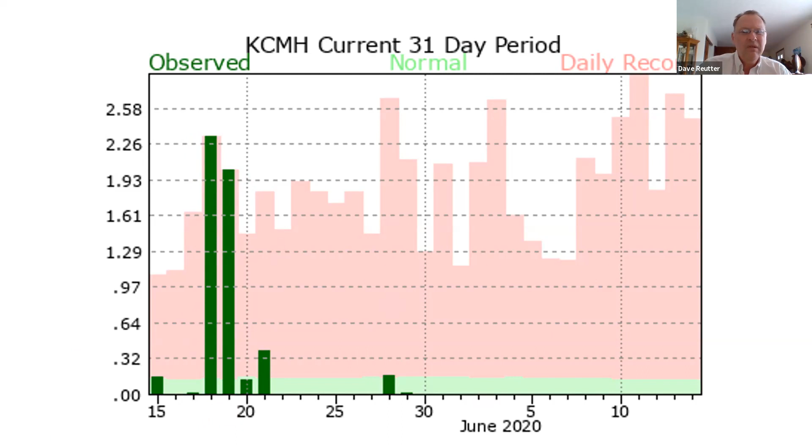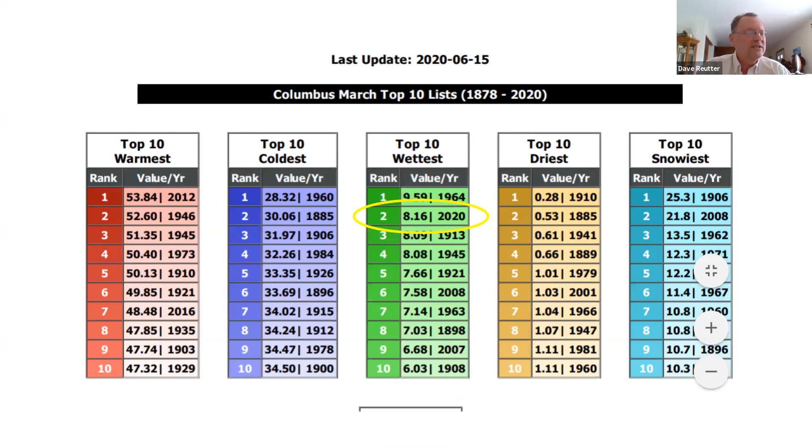There again, you can see our top 10, 20. So then here's our annual data.

You can see down here, we're looking at June. Here's the 2 events—you see these 2 steps in the precipitation right here. Here's your March event, here's your May event. And we're already at 25.6 inches of rainfall compared to what your average normal is, very low, much lower.

And if you look at the top here, our average rainfall, most of it occurs here. Here's the peak—we haven't even gotten to the peak yet. So we are well on our way to perhaps another record-breaking year of rainfall. That'll be, we'll have to wait and see what happens as far as the rest of the year.

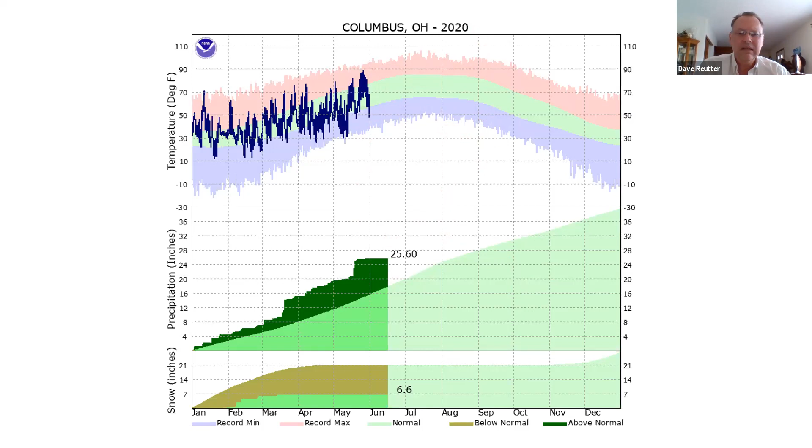So the other thing I want to take a look at then is just kind of what that does—how does that affect our streams? This was a presentation you can see from our expo. Dr. Bob Hawley presented, and again, like I say, we'll have this resource.

You can look at the whole thing. I'm not going to go through the whole presentation—he's got about 150 slides on here. So we'll just kind of hit through some of the highlights, at least that I thought I want to present. And some of that is looking at, what is the urban stream syndrome?

What's causing that? And those drivers, you can see: direct effects, channelization, indirect effects, pollution and stormwater—but how those all combine within the streams to get that biological response, which is often what we do to look at these streams. We do sampling in the streams, we look at the bugs, we look at the water quality, and we say, hey, there's a problem with this stream. What is that? But you've got all of these altered features that are happening because of that flow regime.

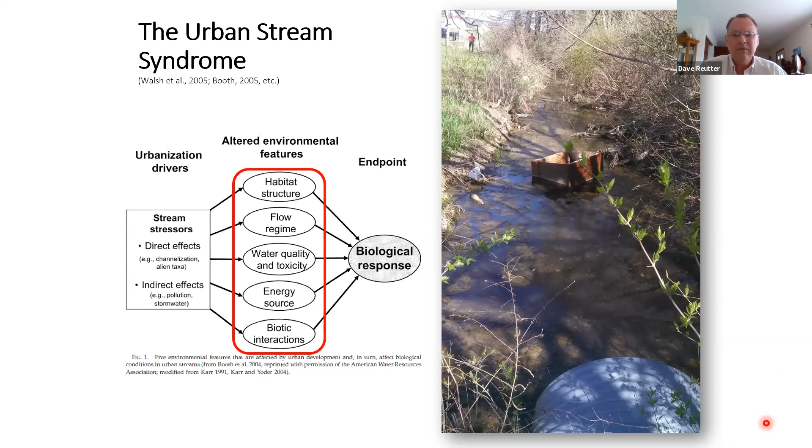Go to the next one here. The stream function pyramid, as you can see, everything kind of builds to that biological. So if you're going to affect change, it's going to come down here at the bottom—you've got to get that base problem fixed before you can do that.

And a lot of that comes to stormwater management. That affects your hydrologic conditions, the hydraulic conditions. It affects your geomorphology, goes to the physicochemical features of the stream, and ends up affecting your biology.

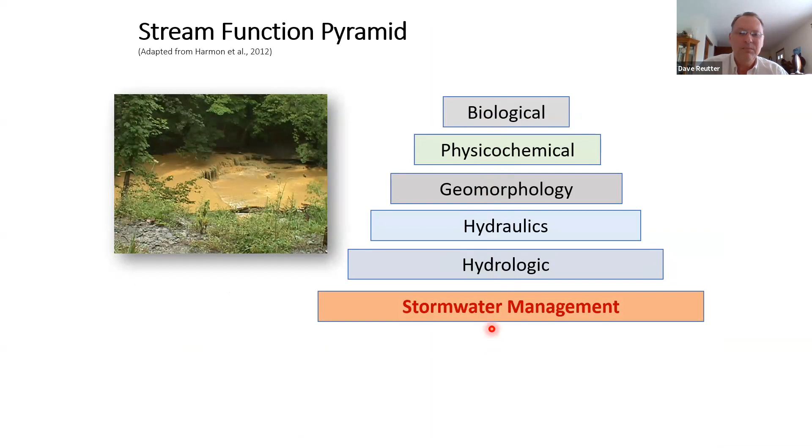So if we're looking at stream restoration in urban catchments, you've got to look at that catchment to save the stream. We're talking about that green infrastructure idea—broad-based changes in the catchment is how we're going to improve our water quality in streams.

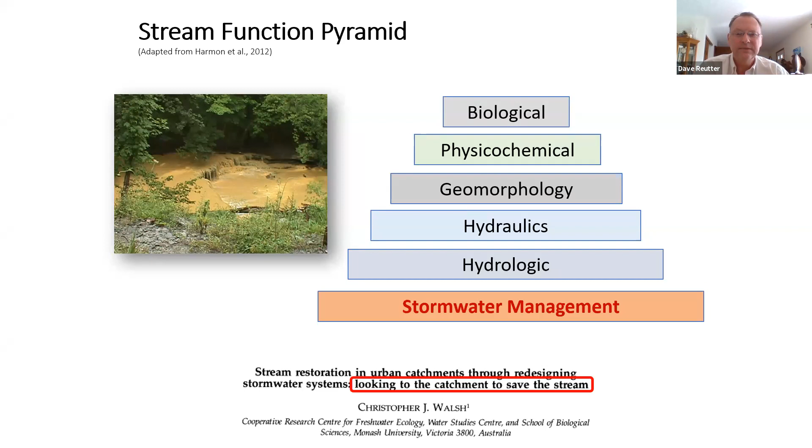Bob did a good job on kind of updating us on how we've developed our stormwater. So this is the last kind of slide in that presentation on where we're at with stormwater: extended detention basins with sediment forebays. And we're looking at basically conventional peak-matching detention, which is how our conventional current stormwater approach is.

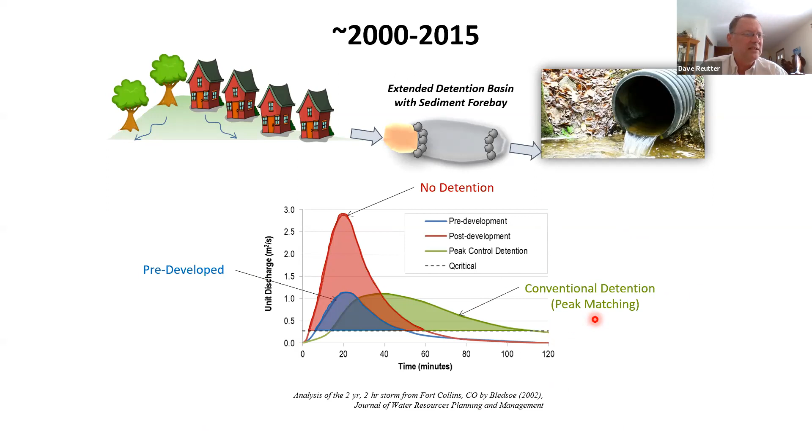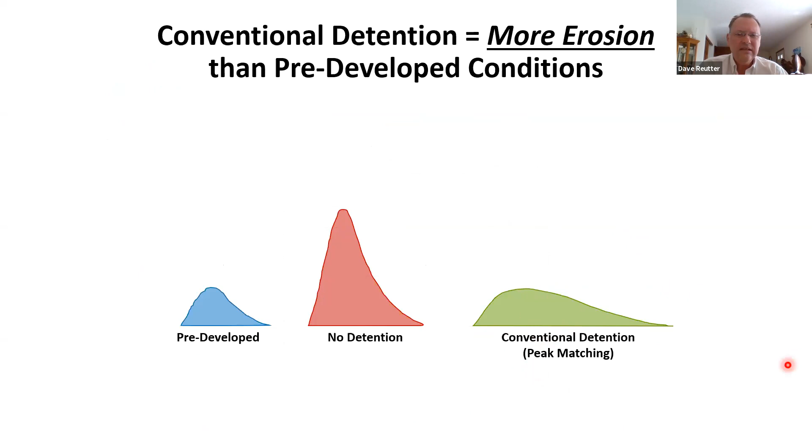Now, so what does that mean to streams? Well, because of that conventional detention, we're looking at more erosion. This is caused because we're looking at that Q critical flow regime that they're looking at, if you've worked with Bob or have looked at some of his studies.

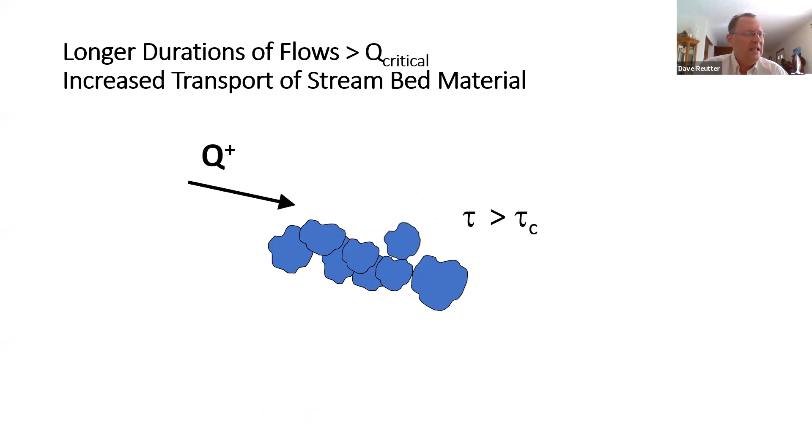As you increase that flow, your material is transported further and larger material is transported. You end up losing bed material—it doesn't get replaced, and eventually you end up with scour.

So let's look at geomorphology a little bit too. It's not just the flow that's in that channel, it's that shape as well. So when we have confined valleys, like you see on the left there, as opposed to an unconfined, well-connected floodplain—this example here is showing a 4-foot depth as opposed to a 2-foot depth over here on this low flow channel because of that connection to the floodplain.

We see this is common in urban situations as well. And something I want to point out here is scale—even though that's 4 feet, this works at any scale.

So even when you're looking at an urban drainage, perhaps if we have a developed site on this side of the bank—you have a home over here, and this is an undeveloped property over here. Well, as soon as you come in here and develop this property and bring your fill in, you've basically created this V-type channel. And what that does is increase that depth of flow, increase that velocity, and you're starting to transport material. So you end up with scour and rilling and erosion.

Or you even push it off onto the properties. I can't tell you how many times we've had property owners say that subdivision that went in next to me is dumping water on my property. And trying to explain this to them and saying, well, actually they're not—it's not, only the slope is coming to that property, and it's no more than it was before.

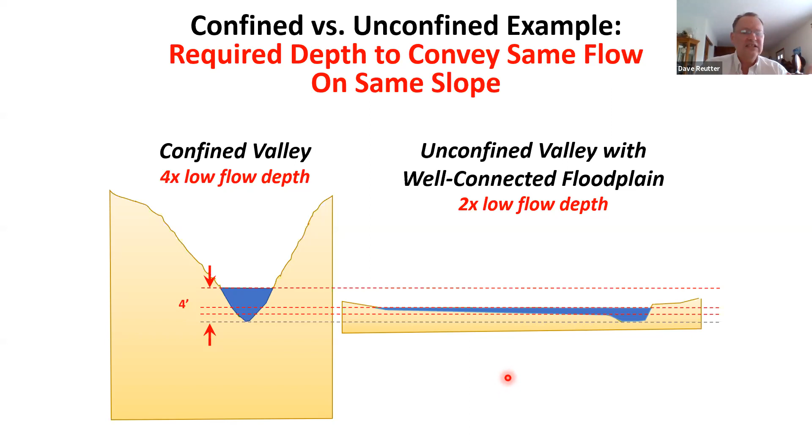The reason this has come up has to do with the permits that have come up recently. If you're not aware, the Ohio General Permit for filling Category 1 and 2 isolated wetlands and ephemeral streams is a draft permit that's out. The comment period ended yesterday for it. This has come about because of the new WOTUS rule for the federal government. The changes in the WOTUS definitions have exposed a lot of these ephemeral channels to non-regulatory aspects.

So OEPA has rapidly put together this draft permit. It's a general permit to cover impacts to ephemeral streams. That's kind of the impetus behind talking about stream setbacks again and what that might mean to communities.

If you're going to have coverage under this permit, it's limited to filling and discharge of dredge material into ephemeral streams determined not to be waters of the United States and not subject to 404 or 401 clean water regulation that would not be covered by the Army Corps of Engineers. So this still takes a determination of whether or not that's Army Corps of Engineer jurisdiction or not.

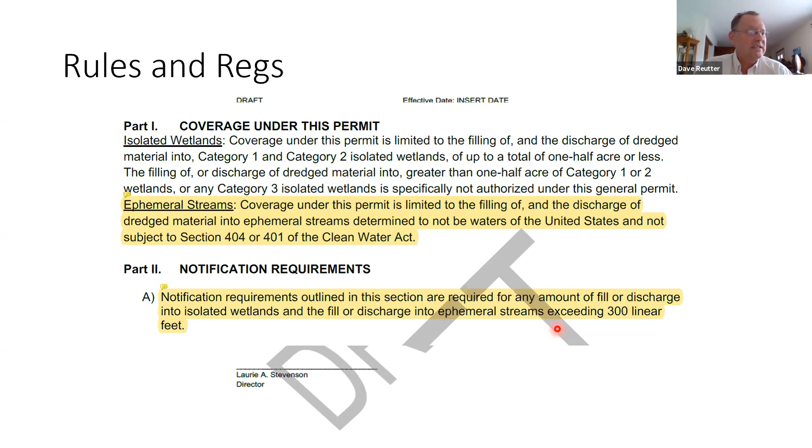So this could be problematic, but...

Dave, if I can pop in there for a second, we got a question that did come through from Paul Kennedy. Let me just read it to you. So he's just asking, curious about which streams in Central Ohio have recently been assessed for quality.

How old are the existing assessments? Are there new assessments coming? This would help inform us where the current challenges are, and then we can focus on the triggers to lower quality. EPA has been slow to resample a lot of these areas.

In fact, they've gone back and looked at their schedule and realized they haven't been able to meet it, especially for the TMDLs. So they've reevaluated their assessment schedule and testing. It doesn't appear to be happening very quickly. They're looking at other avenues, like citizen support on testing. We've even looked at how we can crowdsource this information and get a better idea of what is impaired.

But yeah, that's a good question. I don't have a good answer for it. It is something that's lacking. A lot of the data out there is old, and that's something we've found around here. There's actually been a lot of improvement in some streams that have been previously designated as impaired or otherwise, and there has been that improvement. So again, I don't have a good solution for that.

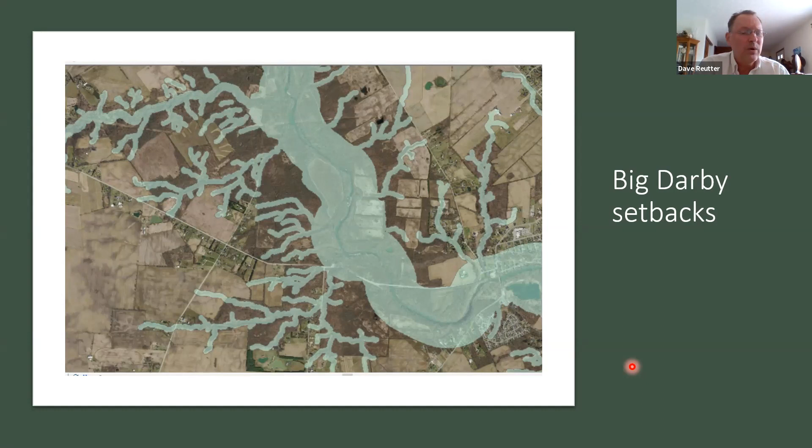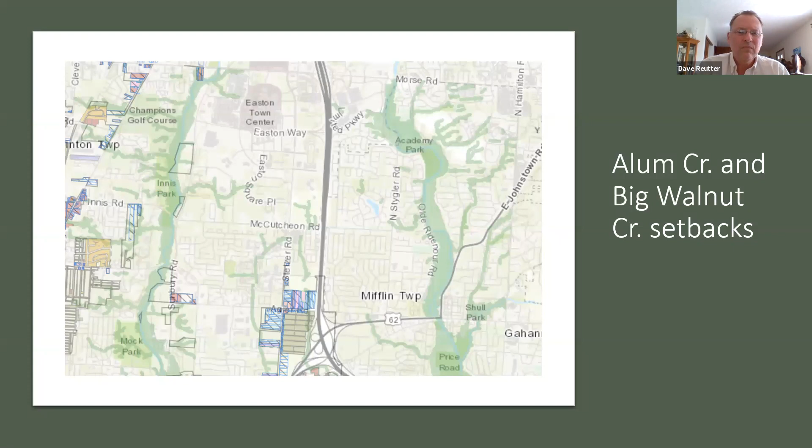Here's Alum Creek, Big Walnut Creek setback, just a map of those areas. Now keep in mind our Franklin County zoning resolution only applies to those areas under the zoning resolution. A lot of our townships have their own zoning, and they need to have similar regulations in place if they're going to protect these areas. It's up to them to review projects and look at those setbacks to make sure they're meeting those requirements. Again, it's applicable to perennial and ephemeral/intermittent streams with a defined bed, bank, and channel.

Columbus has their stream corridor protection zone based on that same drainage area calculation - times 147 - either that or it's got a minimum of 50 feet to a maximum of 250 feet. Something I want to point out in all of this is there are usually regulations in place, but they're variable across the board. I've seen even some of our townships have different standards applied to the stream setback. So you really got to look at that local area to see exactly what it is. It is not straightforward - it's very confusing, and that's one of the problems with stream setbacks.

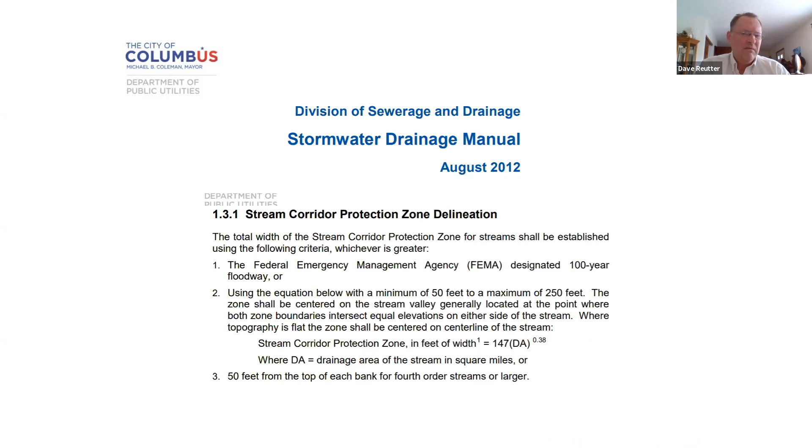You can see a little bit clearer - again, like I say, 50 feet. And something, number 3, 50 feet from top of bank for fourth order streams or larger. I hope everybody knows what a fourth order stream is - I hope everybody can find a fourth order stream designation, it's very hard to find. If you don't know what we're talking about, it's basically the main stems of the Scioto, Alum Creek, and Big Walnut. Beyond that, those are not fourth order streams. So really we're talking about the main stems of our larger streams around here.

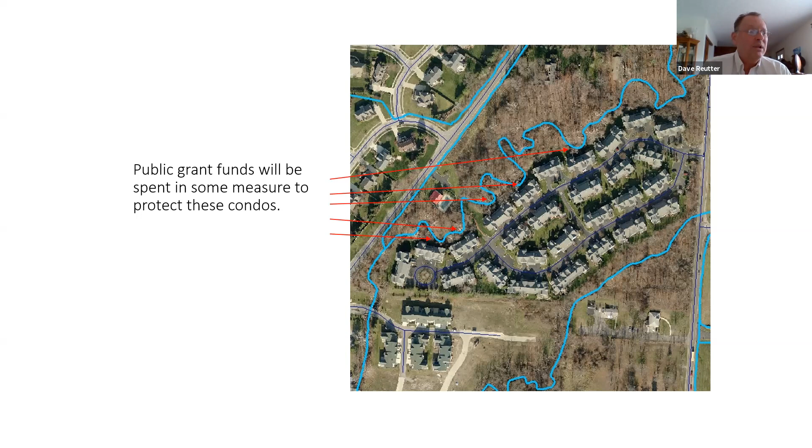A lot of these, when we go back and try to retrofit, it's a tough thing to do. It is very tough, especially when we're talking streams. How do you mitigate for a stream impact? In the draft permit, the areas that do require mitigation, it's gonna go to a bank. You're gonna lose that stream function in your local area for buying credits in a bank somewhere, and it probably, most likely, won't be in the HUC that you're in.

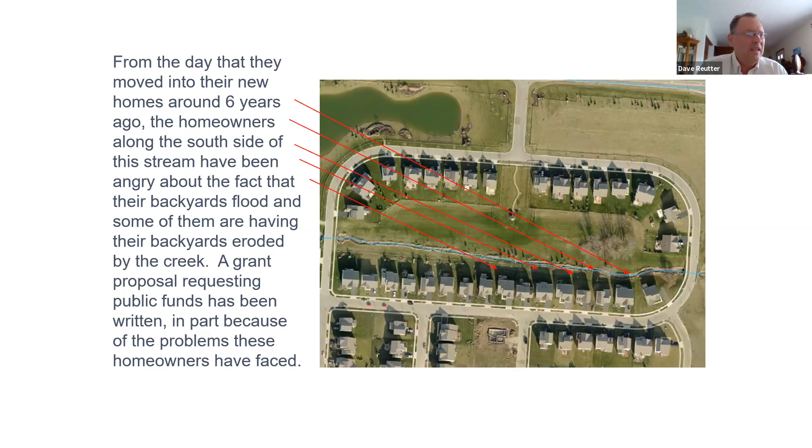Another example: these homeowners have been struggling with this stream in their location. Yet, that's how it was built, meant to be. Fortunately, they have a reserve area that is able to overbank, and it frequently looks like this. But you get complaints from neighbors, hey, our backyard's flooding, what do you do with that? Well, again, this can be looked at as an amenity, not necessarily a flooding issue.

Road protection. You can see the bank protection that's been in place, riprap has been placed for protecting that bank.

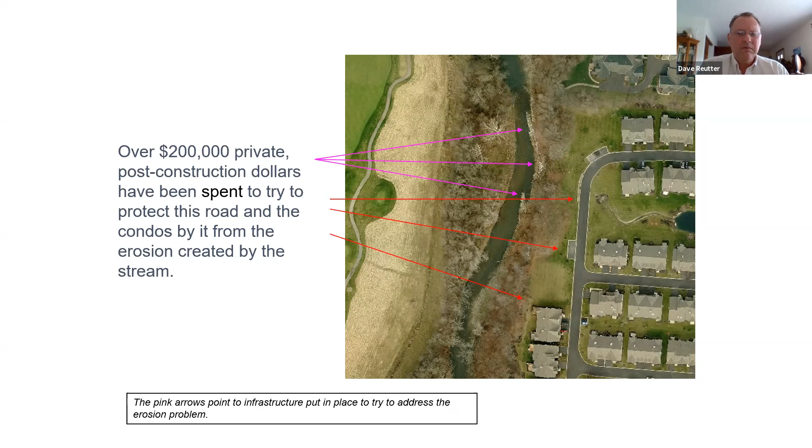Here's a stormwater pond. This was placed in the floodplain. The creek flooded and overbanked, and broke through and actually captured this stormwater and captured the channel. This has since been repaired, but there was an outfall through here that the channel redeveloped and reconnected, and the storm pond actually captured that channel.

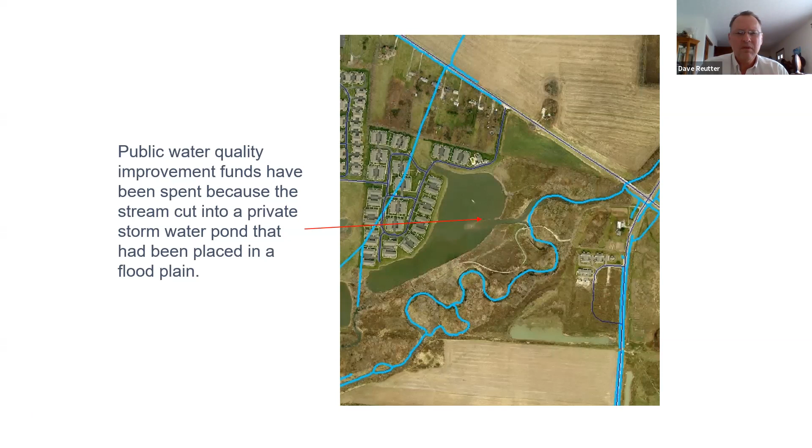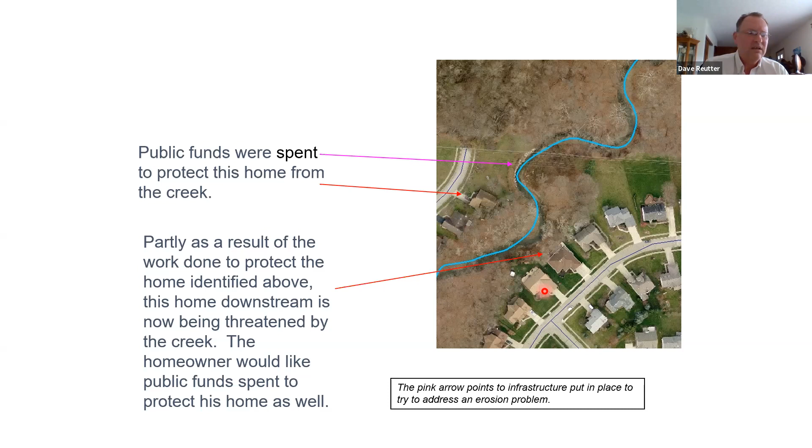More public funds spent protecting a homeowner. This is pretty common in most of our municipalities that have these older areas on streams. We love our streams to death - everybody wants their back deck and porch overlooking the babbling brook, and that's problematic.

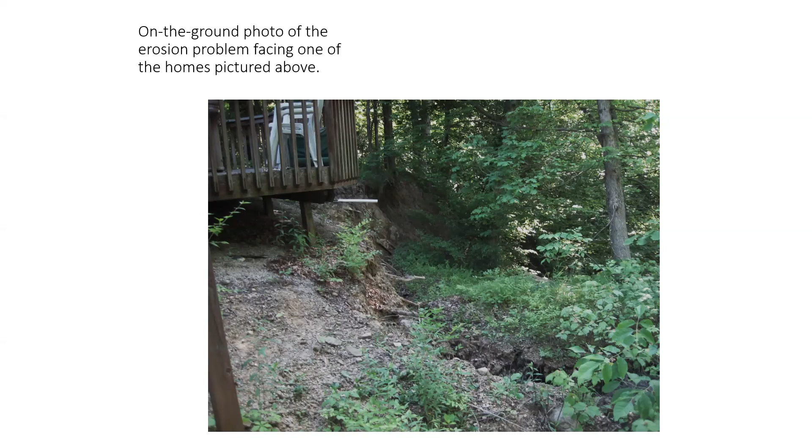Dave, I will say maybe before we move on, those last few slides were really telling of the situations we see every day and deal with daily. That last one showed where public funds were used to protect one homeowner, and now a homeowner downstream was starting to have erosion as well and wanting public funds used to assist them too - just that spiral effect of where this kind of goes.

Yeah, and that's something we kind of see - one homeowner rip-raps a bank and it just transfers that energy downstream and we end up with another problem.

Some of these situations have larger areas across the stream that don't really affect anybody. You see in this example, a lot of these are on private property. This lot here - you can see their property lines extend off the picture basically, and that entire stream is basically on private property.

What they can do with that, if you go by the new general draft permit, they've got 300 feet there that they can basically work on at will, with no recourse basically.

We need to look at ways of helping them help with the stream problems. So that again is an ongoing issue we deal with - how to appropriately address this in a way that's going to function for both the homeowner and the environment.

And in a lot of these situations, there's nothing to do. With the property being threatened, it's going to take hard armoring to fix this. There's not always a good solution.

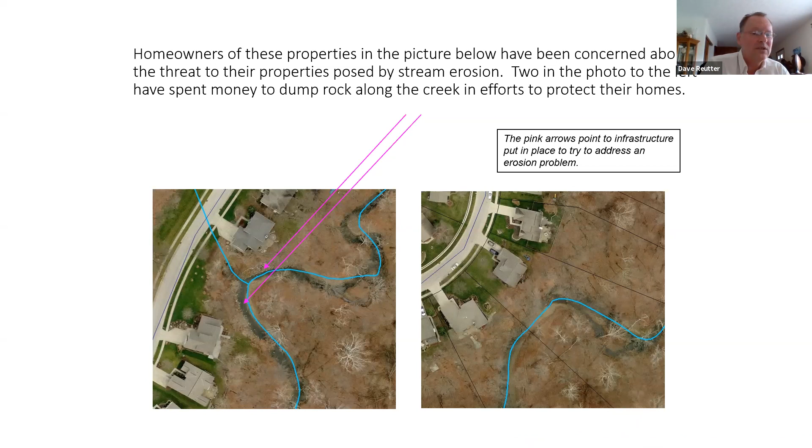Kind of a good example here - you can see on this property, this one, their deck is right on the edge. If something's not done here, they're going to be having problems.

If you notice on this, this doesn't look like top-down erosion - this is the other thing of looking at what the problem actually is. This was mass wasting at the toe of the slope, and that area has slumped down into the creek. So this is a good example of what we're seeing with urban stream syndrome - mass wasting at the toe of the slope and the failure of the bank sliding down into the stream.

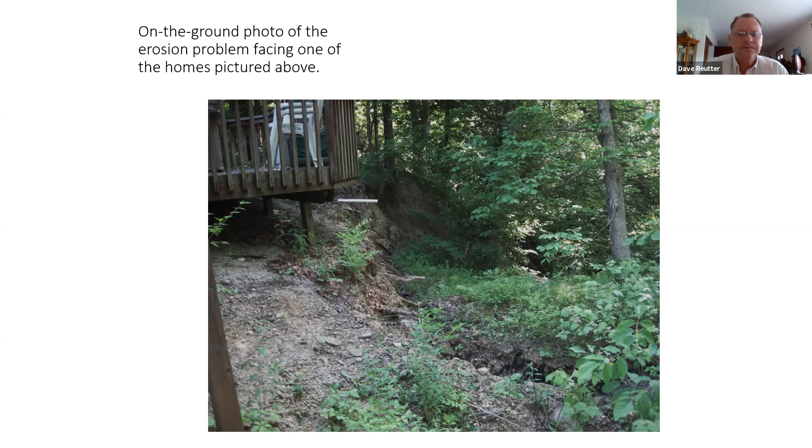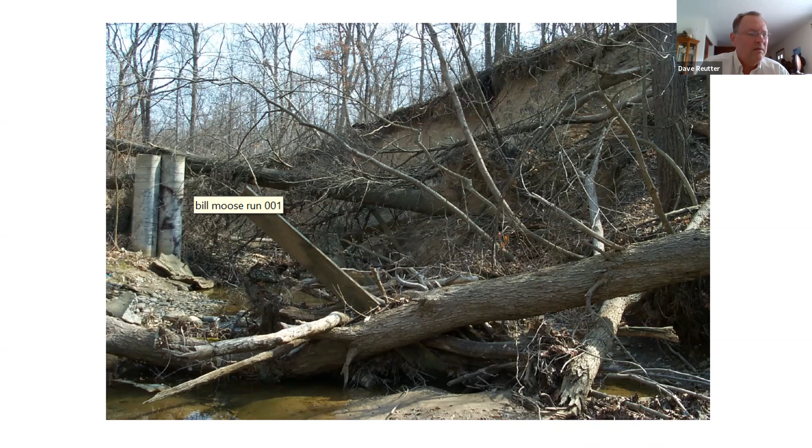Here you can see remnants - here's a fence that slid down the hill. Again, here's this large mature tree that's been hanging on for the time being. Mass wasting at the toe of the slope, and that sloughing of the slope.

Looking for setbacks, we're still allowing construction to occur very close to steep slopes. This might have a setback from the center line of the creek, but it's not including that steep slope area as well.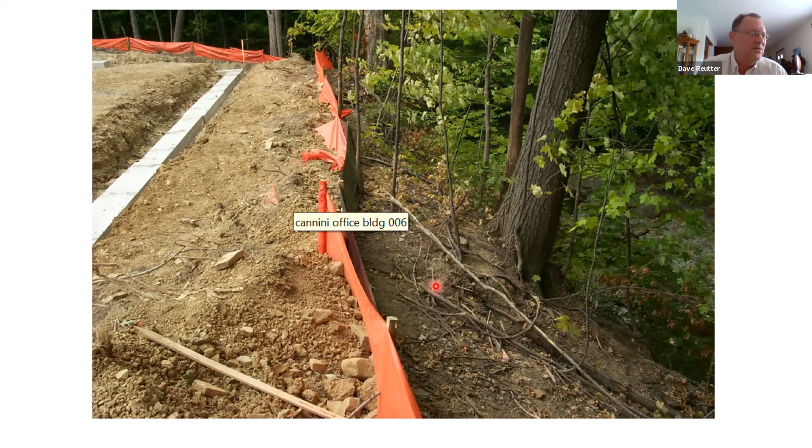Another example, and you notice these are not young trees, these are not areas that have been eroding over time. It's happening in a fairly quick time frame, and that's the readjustment of the creek, looking for that new channel width because of increased flows and movement of sediments. Most of our creeks are sediment starved.

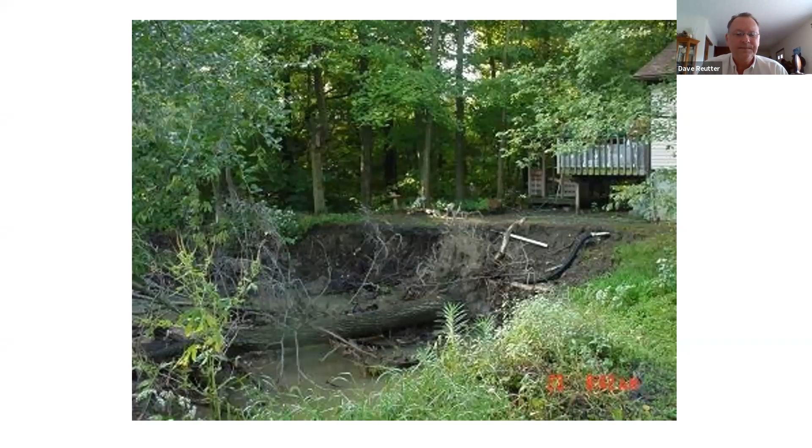If you look at them, you'll see hard pan, a lot of clay bottom creeks, and they're looking for sediment, so that gets scoured off the banks and carried downstream very quickly. Hard armoring, sometimes this is what it's going to take. I offer up to you, I don't know what value that is to a homeowner. I guess they can still see the channel, but I'd hate to have to walk down that bank to explore my creek or enjoy my waterfront.

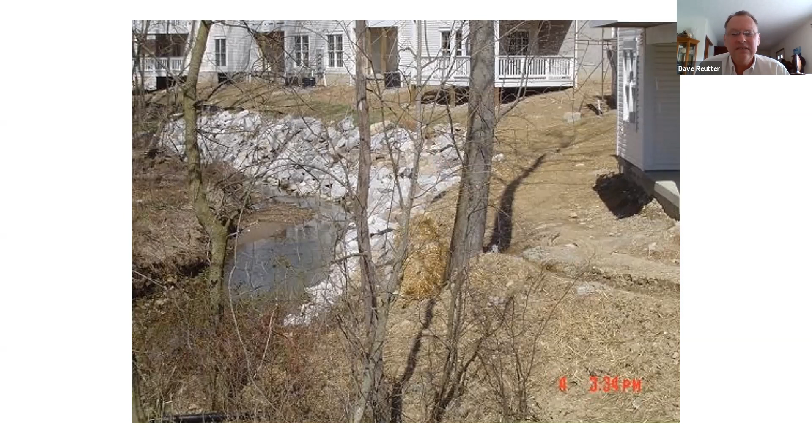Maintenance-wise, you get all sorts of things growing up in between the rocks. It's tough to maintain. You end up with woody vegetation coming in there that gets cut down because of views, or it's noxious usually, or invasive plants. But again, what do you do if you don't have that setback in place that's appropriate for that channel?

So something from a legal standpoint, at least, is looking at these. I know a lot of municipalities have not had the political will to implement setbacks because of that taking, or having to pay a landowner.

But if we look at some of the revised code language, changing flow water by volume, direction, velocity in a manner that causes damages to upstream or downstream neighbors may result in legal liabilities for those damages. So a lot of times we point to Ohio water law and say, well, this is a case by case basis, and neighbor against neighbor, a civil case.

How can we avoid that and do what's right in the first place? I think looking at setbacks is the way of doing that, and having strong setbacks for the future can avoid a lot of these problems.

And again, this is part of our green infrastructure. This was something EPA came to one of our expos and did a green infrastructure and codes and ordinances presentation, which will be part of our resources that you can take a look at. Just trying to highlight some of this.

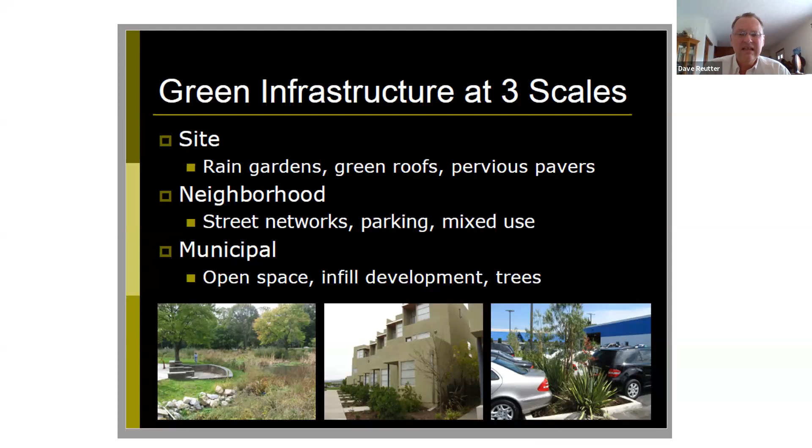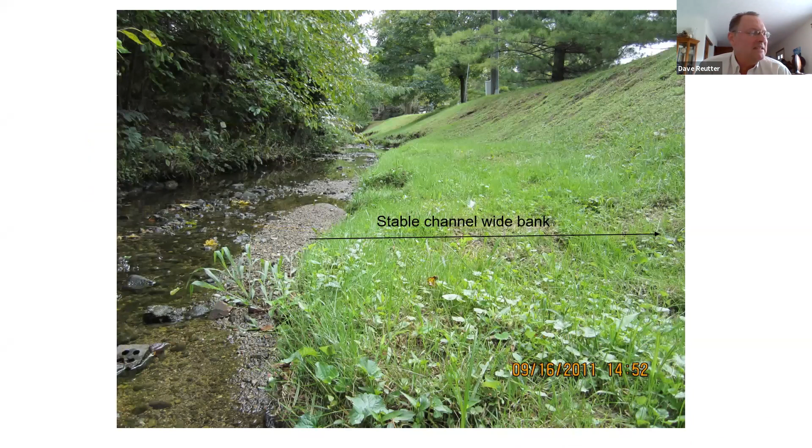Just to highlight that little circle. So when we're looking at small urban channels, you can see this on a site-by-site basis. Here's a stable, wide bank area to overflow. You look right downstream there, you can see where the instability occurs, that narrow valley starts occurring. You start getting that increased velocity in the channel, that increased movement of sediments.

This location, you see the deposition that's occurring here, and if you can see down here, you start seeing the cobbles. So this scale-wise works, from a very small scale to very large scales.

Something that we've looked at is how do you affect some changes in urban areas? Here's a small drainage ditch in the backyards of a very urban setting, but then you've got these open space areas, currently mowed and maintained. This is how it is.

What if you were to take and change this contour a little bit and put in an excavation? I did some quick calculations here - 4-to-1 slope, 2 feet deep, you do a 10 by 10 square. 181 of these equals an acre-foot of storage.

On this catchment right here, we have problems with drainage, and they've looked at the overall catchment, and they need about 2 acres of acre-feet of storage to affect some significant change in this. In a broad brush manner, if we could find 181 areas like this within this stretch, we could actually get an acre-foot of storage by recreating something like this.

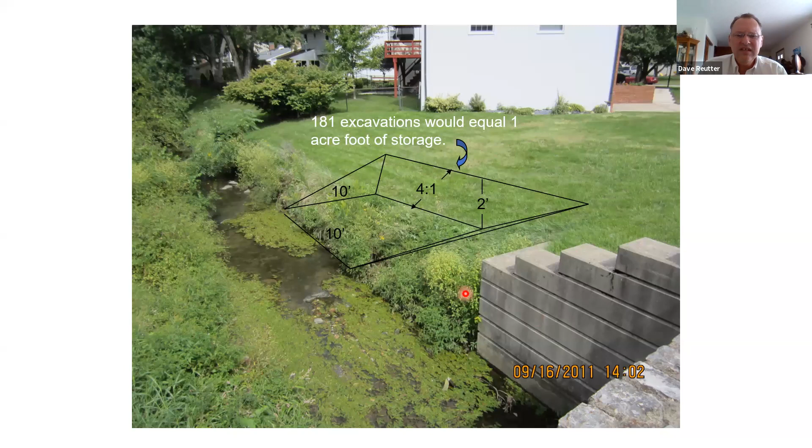This can take several different forms. What kind of things can we do? Maintain turf - it could look just like it is, except just a little different shape. It would flood during flood times, but then go back to a maintained turf situation.

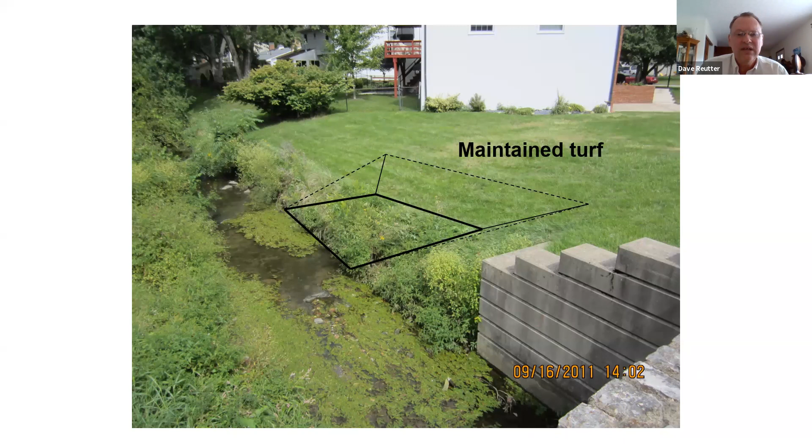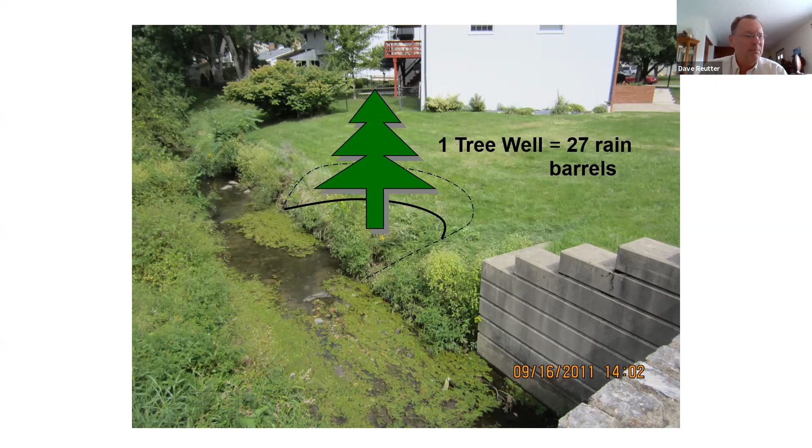Tree wells are something that could be easily implemented, maybe as a municipal program where they excavate areas and plant a tree, creating a riparian corridor throughout the catchment. I did a calculation on this. We promote rain barrels as a gateway to stormwater awareness, and this area would equal 27 rain barrels throughout the catchment. So beyond a rain barrel program, tree wells could get you 27 rain barrel equivalents in something of that nature.

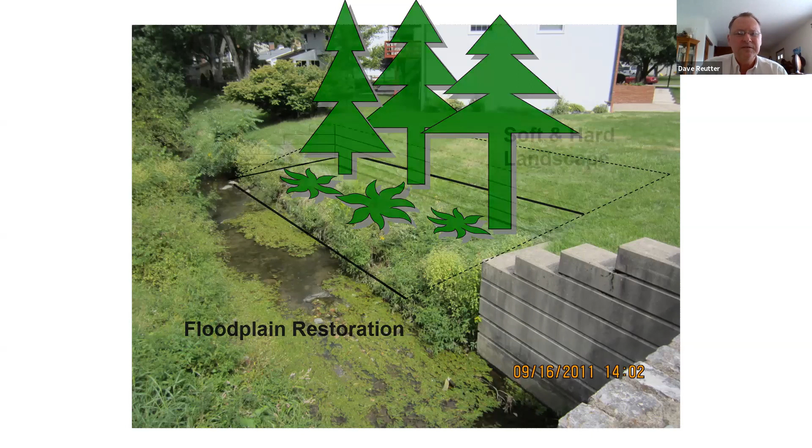Floodplain restoration: find areas like this and look at recreating a floodplain area. This could be easily done. Soft and hard landscaping, like you see there with the wing wall, could be continued. Of course that's an expense, but it could be a retrofit stormwater solution within municipalities and along creeks.

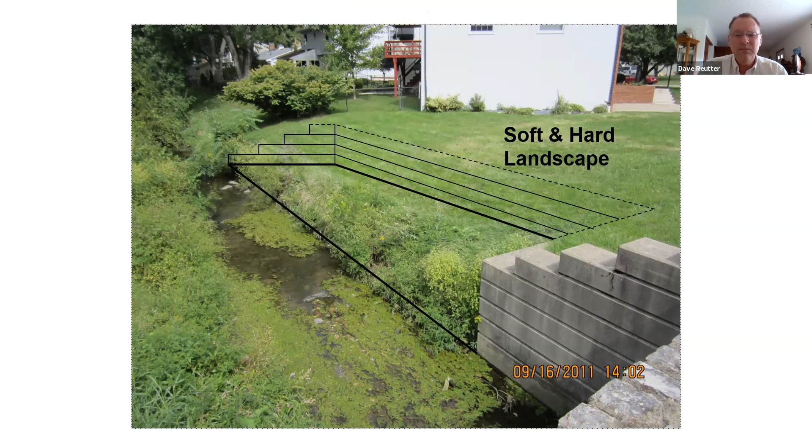Here's an example of somebody's backyard, and what we typically see is the filling of these areas. They add riprap because they don't like getting water on their lawn, so they bring in riprap and fill, confining that channel within the valley. You see the erosion occurring along that bankfull flow, because that flow is getting confined and speeded up, moving sediment downstream.

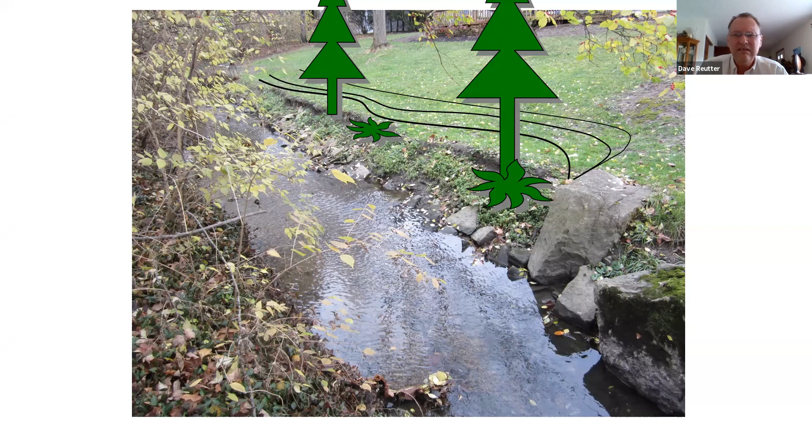This could be a backyard amenity to the creek. You come back in, put some trees in, contour it nicely. Instead of worrying about your kids falling off the bank into the creek, they can approach the creek on a much gentler slope. You're not going to be down there during flood events anyway—these are very flashy creeks that respond to flood flows within hours, within 12 hours, and a lot of times draw back down. They're not extended areas that flood and kill grass; you can still get back in and mow it, but these can be amenities to your properties.

This is something I think we need to approach through setbacks. What can I do with my setback on my property? I can't build in it, and I'm paying taxes on it. How can I affect a change that's actually good for water quality and for my property?

With that, I'm going to swap it over to Kyle to talk a little bit about setbacks and easements, and perhaps about what we can do from a tax abatement standpoint—how can we make these amenities actually helpful to landowners who are often paying taxes on large parts of property that could be benefiting stormwater, the environment, and the pocketbook of the residents.

So Kyle, are you ready to go? Let's play that—let me set that up first. I meant to play this back when I was talking about the weather. We've got a video from our Hellbranch Meadows project, a stream restoration project. This was during that May 18th and 19th event, or just after it—I think this was on the 20th, the day after.

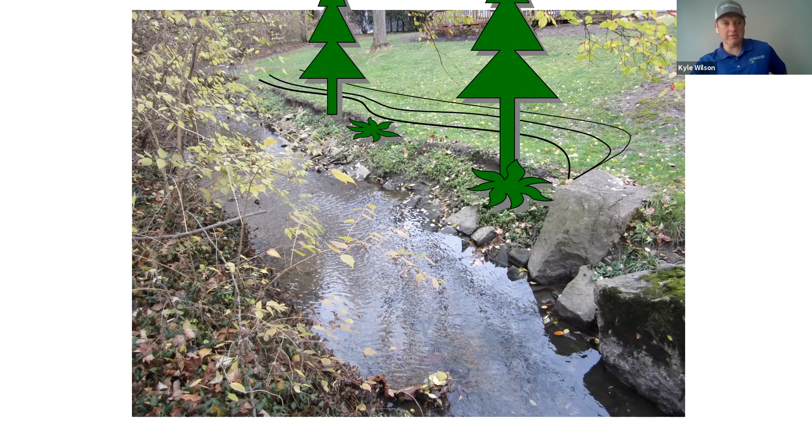I'm going to be quiet for a while and let you take over. Brooke, do you have that to share? Yeah, hang on one second. Dave, if you can stop sharing yours. Let me pull this up. Hang on one second. Okay, is that showing up? Looks good, looks good. Okay, let me go ahead and.

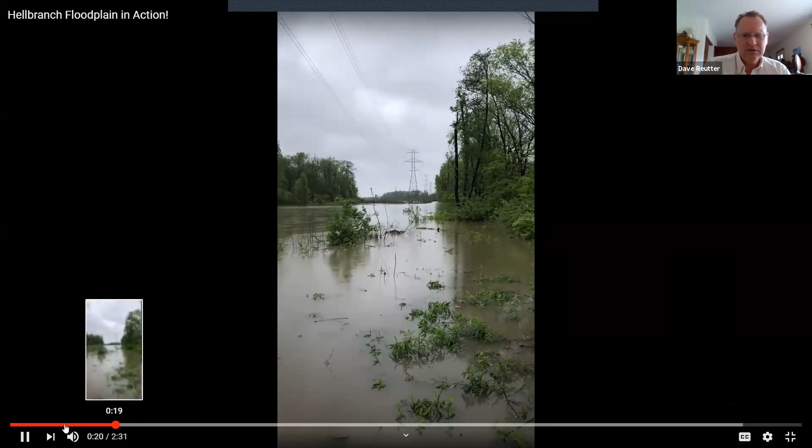I'm seeing it, but no video or audio on it. No audio? Yeah, I'm not getting any audio. Let me try, hang on one second.

Hi everyone, Kyle Wilson, Conservation Program Manager with Franklin Soil and Water. Last night we received a pretty substantial rain event. Some places in Franklin County received over 3 inches of rain from what we're hearing. So I wanted to come out to one of our restoration sites, Hellbranch Meadows, and take a look

So as we're looking here, you can see Hellbranch Run coming in from the north of our property, and it enters Hellbranch Meadows, where we have a multi-million-dollar stream and wetland restoration project funded by the Ohio EPA. And you can see, as you look north, Hellbranch was formerly ditched and straightened, was an over-widened and over-deepened channel. So even now, most of its floodwater is contained within that channel and not able to access the floodplain. Then as you come into our property, you can kind of see immediately with the reconnection to the floodplain during the restoration that we have floodplain access and a great deal of it.

The stream flows just on the other side of the tower there, and you can see moving water out in that area. But here closer to me, you can see water that's much more stagnant, flowing through here, but able to keep that velocity down up on these floodplain benches and way up into the new floodplain for Hellbranch Meadows. So we're getting all this storage, we're reducing flows downstream, we're filtering out those pollutants, and you're getting a much more naturalized floodplain setting here that in the past we weren't able to see taking place.

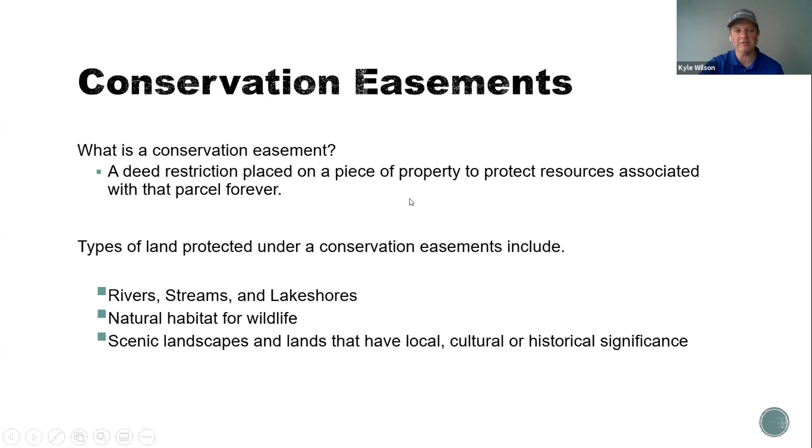You can also protect land for habitat and wildlife, and for scenic and cultural resources as well. So these easements can be used for protection in several ways.

There are certain activities that are not allowed in a conservation easement. The good thing about easements is they can be written individually for the needs of the property and to accommodate the landowner and what's taking place there. They can be on a case-by-case basis and vary from one site to another. But in essence, they want to prohibit activities from taking place on that land in perpetuity. Those activities include drilling and mining, building and construction is the big one, timber harvest at times, mowing and spraying, and power line utilities and things like that.

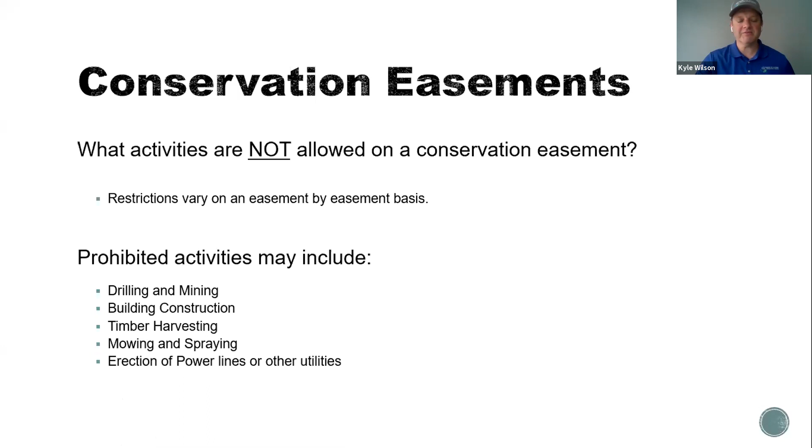So these are good tools in conservation to really add that extra layer of protection to things. They're also a way to allow things to happen in there.

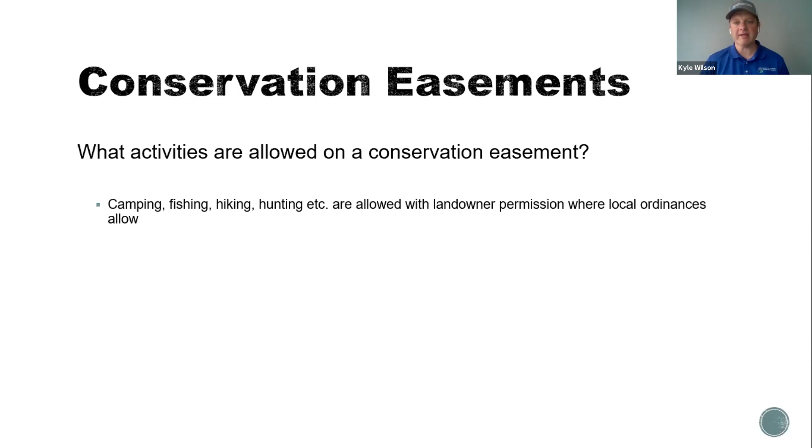You're still allowed to access conservation easements. It's not a nature preserve where everything is just hands off. You're allowed to recreate there. You're allowed to do things as long as it isn't expressly prohibited by easement language. Landowners can retain the rights to the private property.

A conservation easement isn't automatically a park, so sometimes in areas where you're looking for protection and approaching people, you say, hey, we've got a stream restoration project and we really need access to your property, and to do that restoration we've got to have some protection long term. People throw up a red flag if they think that's going to become a park and people are going to use it. But with conservation easements, you're able to maintain that private property and still get a right.

Again, it's private land, not necessarily public land. Easements can be on public land, and we do hold some for municipalities that want to protect certain lands, but it's not a requirement.

And again, you're allowed to do anything consistent with deed restrictions. One example we always use is a lot of people like to maintain the right to get firewood from their conservation easement areas, and we're able to accommodate that in the deed language simply by saying if it's dead or downed wood, they can use it for firewood and things like that.

So why grant conservation easements? Protecting property and natural resources from impending development is the big one. It's got to be a driving factor.

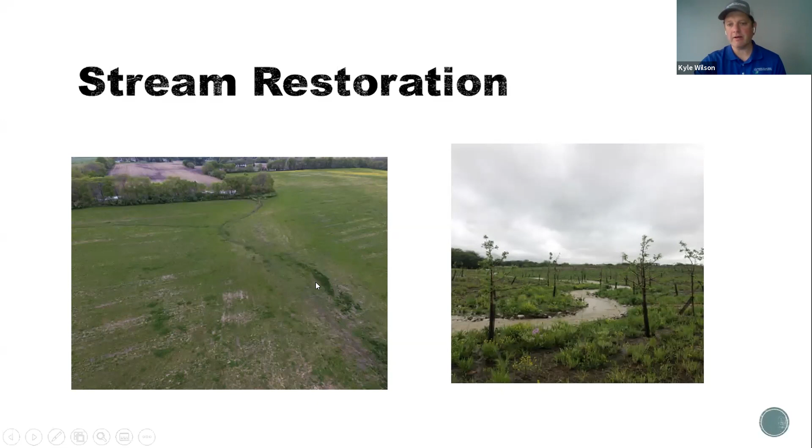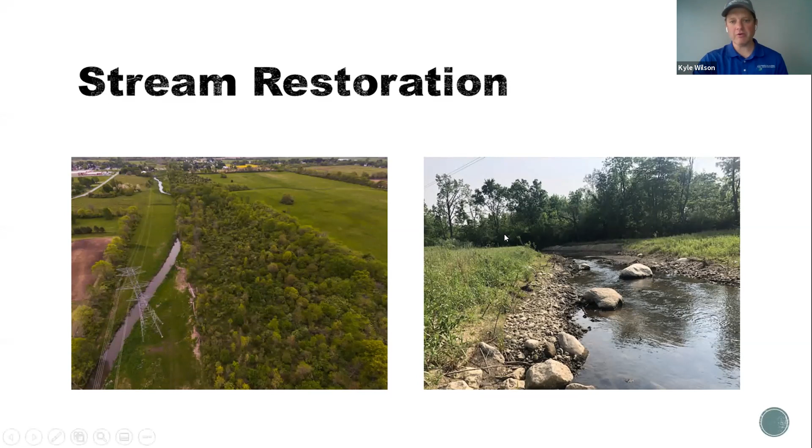The photo on the right is post-restoration, so we've got a channel that is actually much narrower in its riffles - it doesn't have that uniform shape. It has those deeper pools for habitat and other things. Again, the major component of this restoration and a lot of others is that floodplain access. So now we're getting up into our floodplain benches on a river where we maybe were only getting up there in the 100-year events or bigger. Creating that floodplain access is key in these restorations.

Wetland restoration - again, most communities have opportunities somewhere for wetland restoration, and our soils are fantastic for doing that practice. On the left is an area that was formerly agricultural soybeans - you can see in the foreground areas where they couldn't plant because it was so wet. Two years after we restored it, the photo on the right was taken recently - that same area now has a large wetland in its place. One day we were out there and there were 22 egrets using it already in its first year of establishment. So the natural resources here in Franklin County are willing to come back if we give them space and give them that initial kick.

Retrofit is where we can't necessarily do full-blown restoration because of some constraints - we can still do retrofit projects. On the left we've got stream insert projects, where maybe a large-scale stream restoration isn't needed, or we don't have the room or access to do a full-scale stream restoration. We're testing out inserts that can go into these streams that provide the same improvement a restoration would, with pool development, taking erosion off of banks, and changing depth and oxygen levels in the stream. So we're retrofitting that stream in a more urbanized environment. On the right, maybe in your community you have big open spaces that can be restored for wetland, or maybe you've got some old basins you could use.

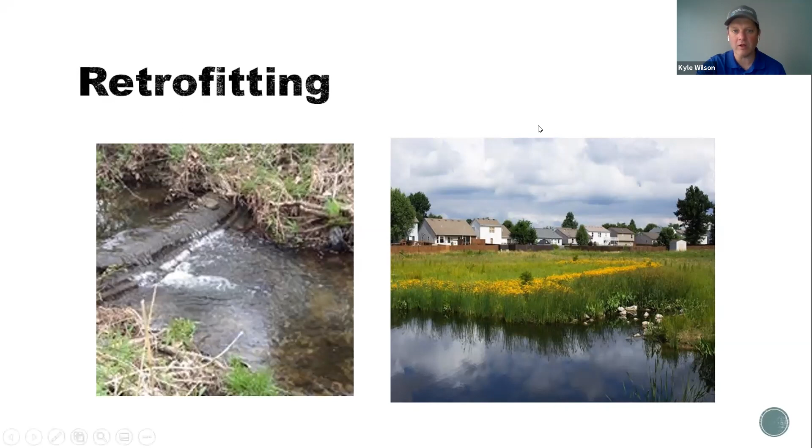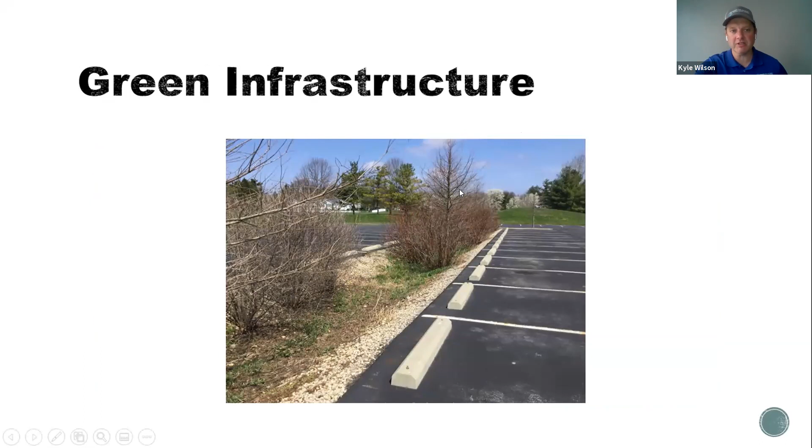And then of course, green infrastructure - they've touched on quite a bit. Within your setbacks and near your setbacks, green infrastructure is pretty important through there. Again, just kind of building on Dave's point of conservation and restoration as amenities for your community.

We see this in a lot of places. We've worked with developments that have come through in the county where there's been a unique resource, and we've worked to protect it through a conservation easement. In the initial process, the developer, for obvious reasons, is sort of reluctant or upset that they're required to do the conservation easement - thinking, I could fill this area and get three more homes, or run my road through here instead.